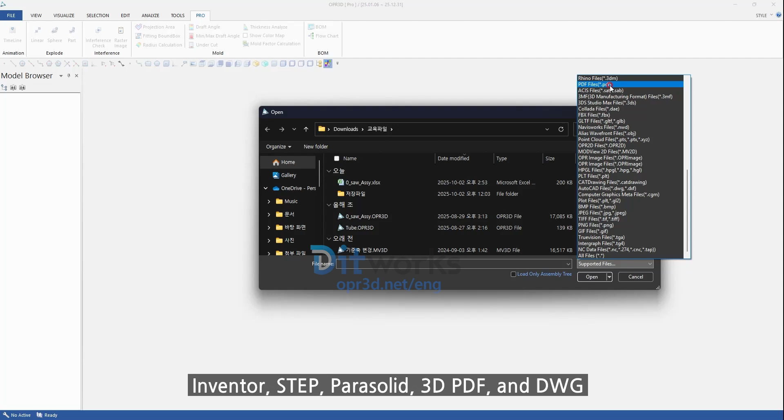Let's start by looking at the default screen of OPR3D. On the default screen, all functions are visible at a glance, making it very easy and convenient, even for beginners to use. OPR3D can read various 3D 2D CAD files, such as CATIA, UG NX, SolidWorks, Solid Edge, Inventor, STEP, Parasolid, 3D PDF, and DWG, without conversion, allowing direct use in work.

Next, let's look at file opening methods. You can easily open files by clicking the Open icon. Alternatively, you can drag files from the folder where they are saved, or select multiple files using the Control key.

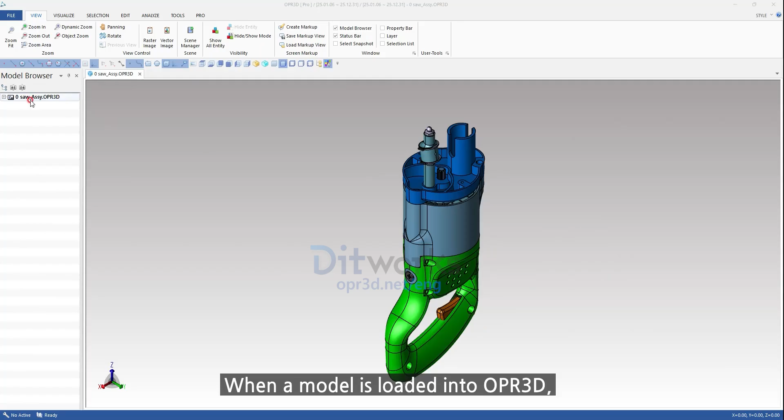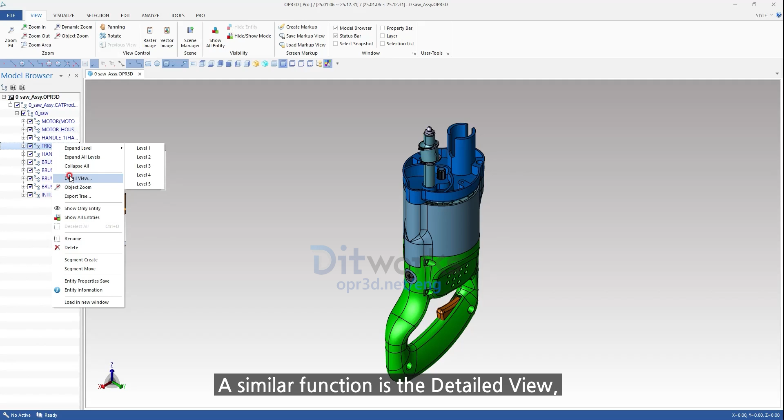When a model is loaded into OPR3D, the model browser properties on the left become active. Through the model browser properties, you can check sub-properties of the model, or turn the model on or off with check marks. Hovering the mouse over the model tree activates the preview function. A similar function is the detailed view, which allows you to check each model tree, or easily use the bound box and image capture functions.

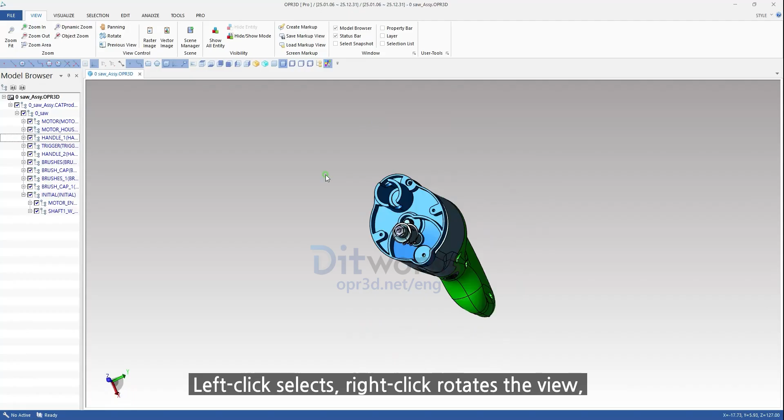Next, let's look at the mouse operations. Left-click selects, right-click rotates the view, and pressing the middle wheel button while moving allows free movement of the view. Scrolling the wheel up or down zooms in and out.

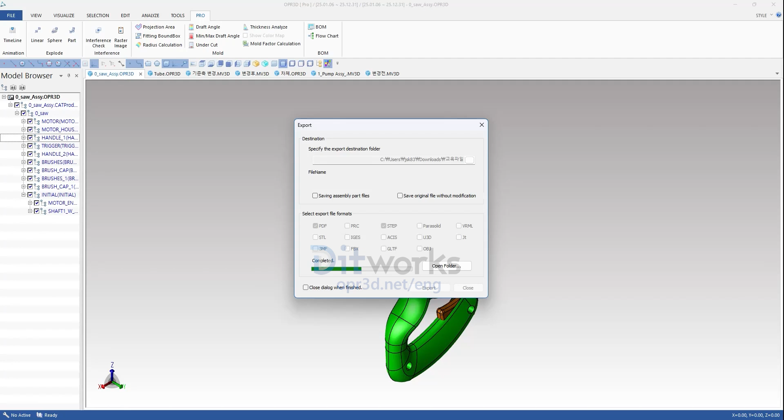Next, let's demonstrate the file conversion function. By selecting the export function in the file menu, you can convert to various files such as PDF, STEP, Parasolid, and IGES, or convert multiple files simultaneously by selecting multiple options. 3D PDFs can be read with only the free Adobe Reader, without any additional 3D software, allowing rotation and zooming of the model.

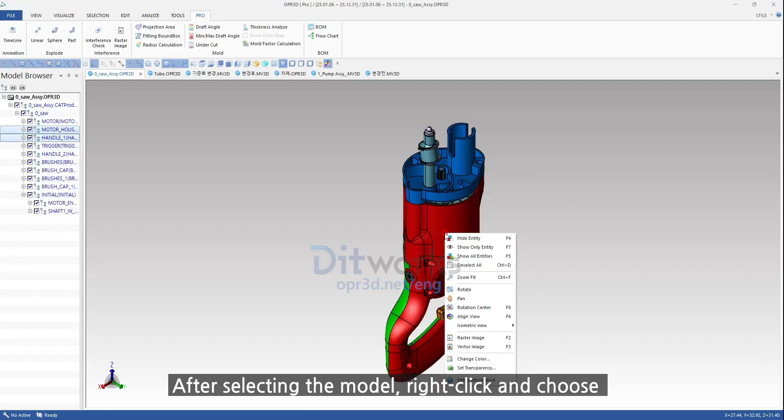Let's change the color and transparency of the model. After selecting the model, right-click and choose Change Color to modify the color. Similarly, right-click and select Transparency to view the internal components of an assembled product.

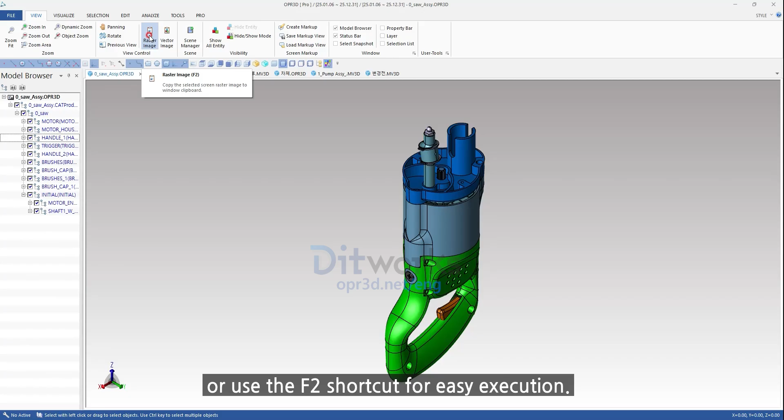Next is the screen capture function. You can select Raster Image in the view, or use the F2 shortcut for easy execution. Once activated, place the area to capture within the selection box, and paste it into a document to confirm the captured product. The background is automatically changed to white.

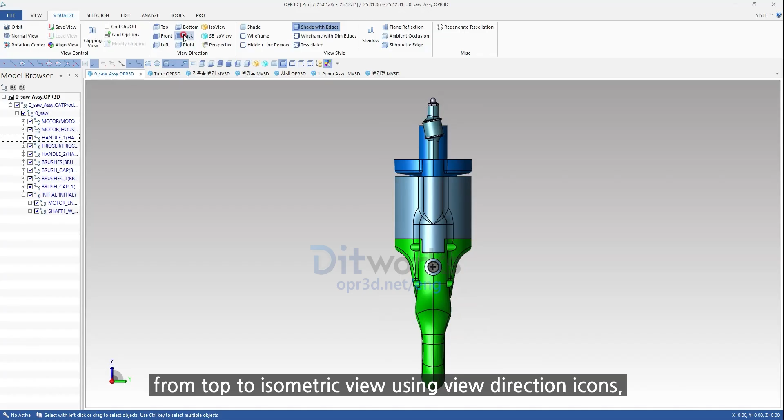Let's look at the visualization features that control the screen. Visualization allows checking the product from top to isometric view, using view direction icons. And view style lets you change the model shading, hidden line removal, edge display, etc.

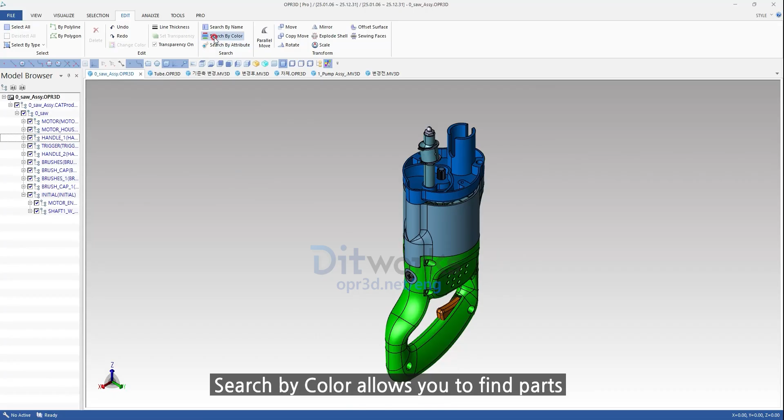Next are the editing functions. Let's look at search by name and search by color. Search by name allows you to find a part by searching for its name set in the model browser. Search by color allows you to find parts by selecting the color assigned to them.

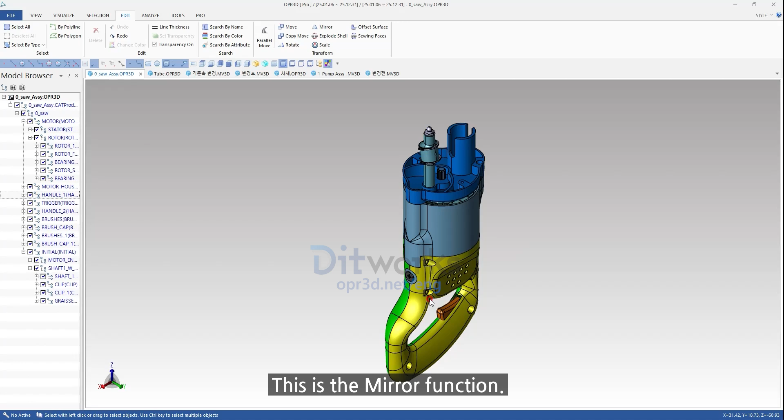Now let's look at simple editing functions for products. First is translation. Translation allows moving the product along X, Y, Z axes, and clicking the center ball while moving the mouse allows free movement. This is the mirror function. It allows you to create mirrored data based on a selected plane.

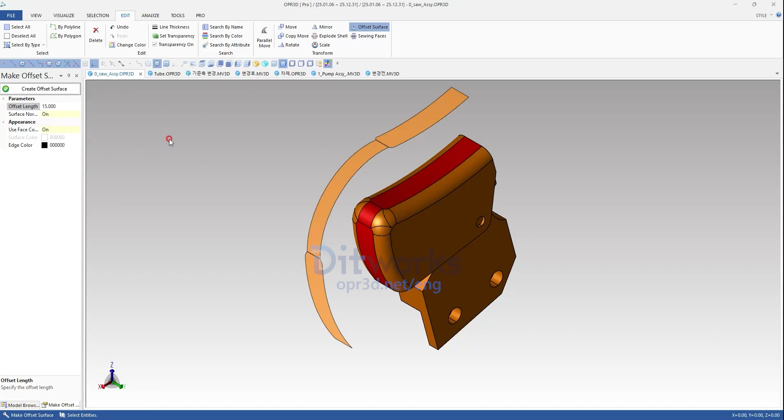The offset surface function lets you create a plane at a user-defined distance from a selected surface, and easily check coordinates and interference with the product. Other functions such as move, rotate, and scale are also available.

Next, let's look at the commonly used analysis functions. The bound box function measures the overall dimensions of a part at once. Select the shape to measure and click Compute to see the width, height, and depth, all at once.

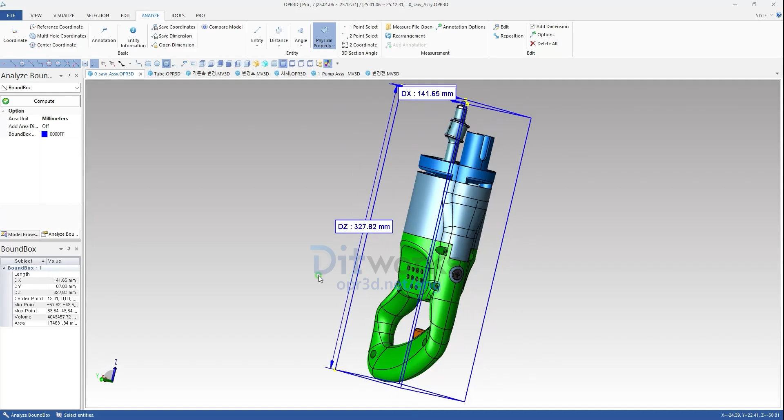Let's measure the product's volume and weight. In Physical Property Measurement, select the volume and weight icon. Choose the shape to measure, and click Compute on the left to complete the calculation. You can select specific points to measure both volume and weight. If the desired material is not available in Options, click Add Material to enter the material name and density, making it easy to add.

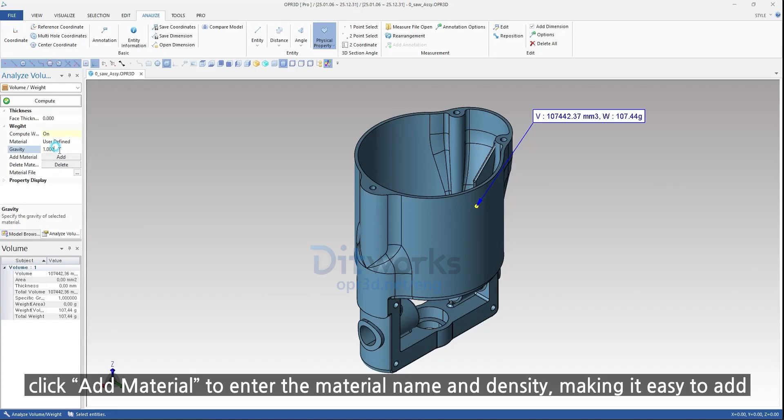Next, let's look at the dimension measurement feature of the analysis function. OPR3D automatically recognizes feature points of the shape, enabling accurate dimension measurement. First is the coordinate function. Selecting a feature point allows you to see XYZ values relative to the origin.

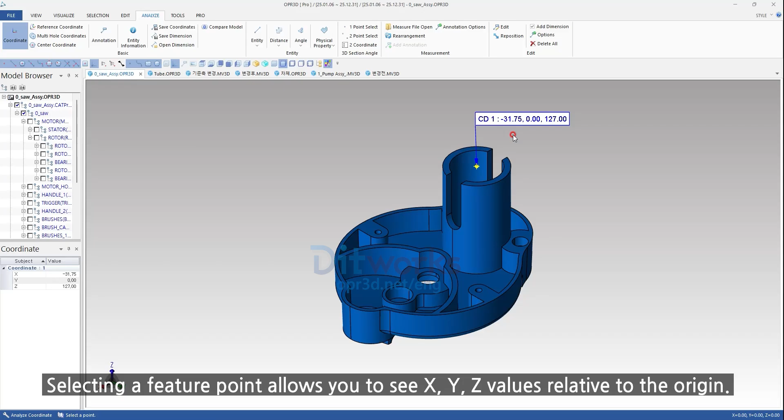For center coordinates, selecting the hole's outer edge gives XYZ coordinates and diameter at once. For multi-hole coordinates, enter maximum and minimum diameters in Options, select the plane to measure, and click Create to get hole center coordinates from the selected plane. Measured coordinates can be saved using the Save Coordinates function for later reference or use.

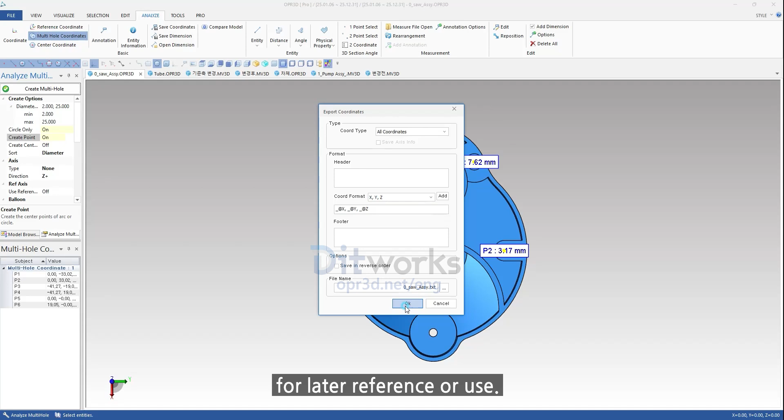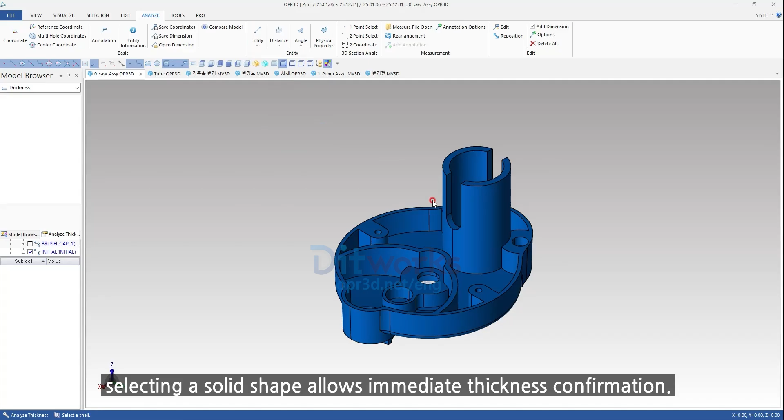Let's measure the radius and diameter of circles and arcs. In Object Measurement, use the Radius function and select the hole's outer edge to see the radius. For the diameter, similarly select the outer edge to get the value. For thickness measurement, selecting a solid shape allows immediate thickness confirmation.

Next is the hole depth function, which measures the depth of holes. Select the outer edge of the hole to get the depth, and holding Control during measurement allows checking stepped areas.

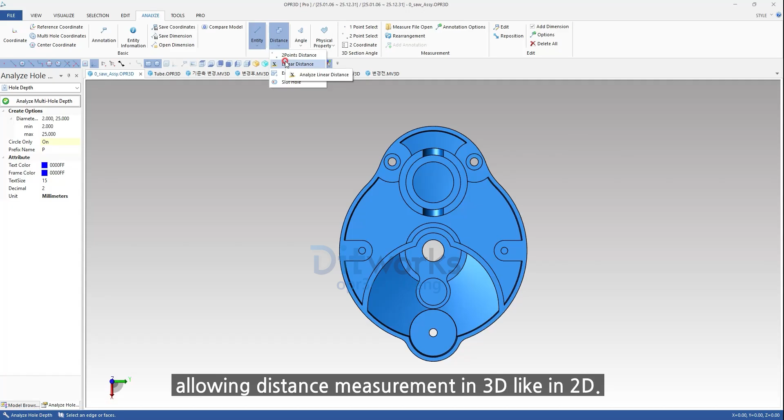This is the linear distance XYZ function, allowing distance measurement in 3D like in 2D. First, set and select the x-axis, then measure. Measured distance values appear aligned vertically and horizontally. Set the direction to Y to measure along the y-axis.

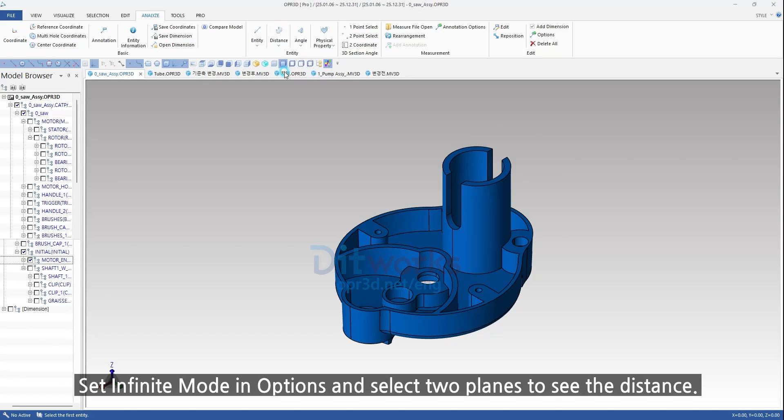Next, let's look at distance between objects, which shows the distance and shortest perpendicular distance between two selected planes. Set infinite mode in Options and select two planes to see the distance. For shortest perpendicular distance, select centers of two holes to confirm the value.

Let's measure angles. The line-to-line angle function allows angle measurement between two edge lines by simply selecting them. For plane-to-plane angle, select two planes to measure the angle.

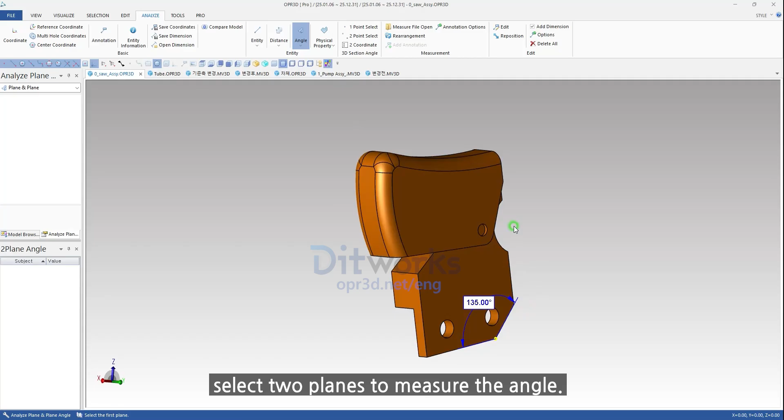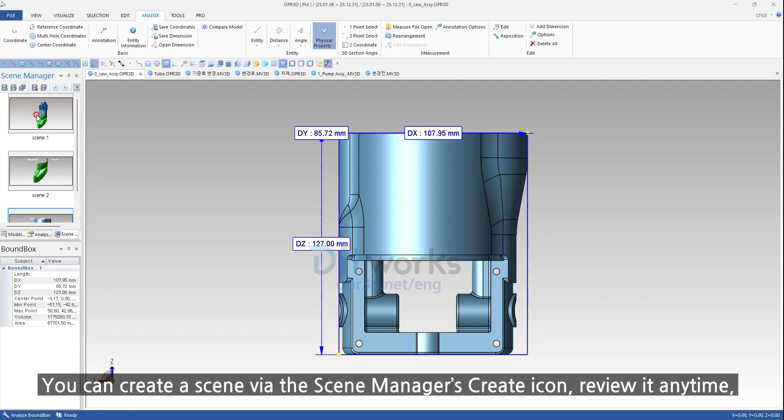Next is the Scene Manager function, which saves the current workspace for later review. You can create a scene via the Scene Manager's Create icon, review it anytime, and update the scene after additional modifications.

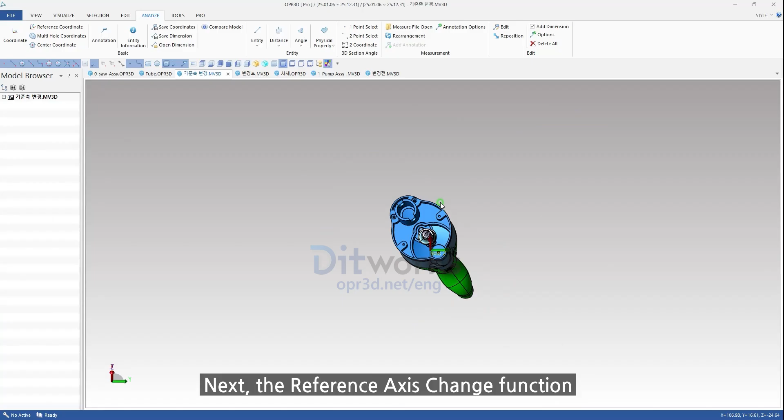Next, the Reference Axis Change function lets you set tilted products in a desired orientation. Create an axis at a desired point, select Change Reference Axis, and the reference axis will update. Changing the reference axis changes the product's origin, allowing rotation along the new axis to set the desired orientation.

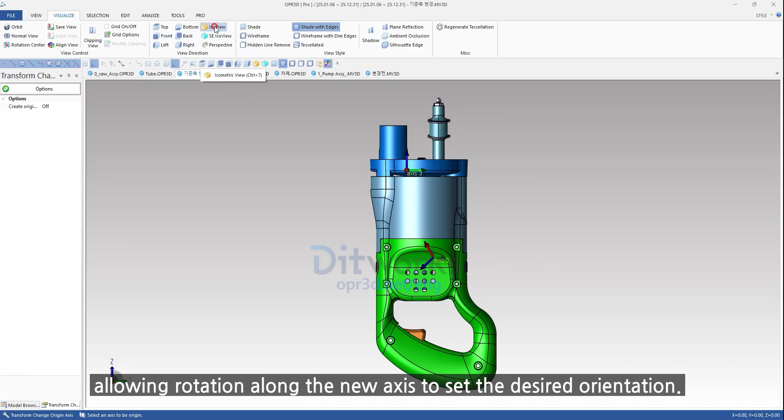Let's look at Clipping View and Planar Section functions for creating cross sections. Clipping View allows users to cut the model along a desired plane for inspection. Using the Change Origin option, clipping views can be generated at the desired location.

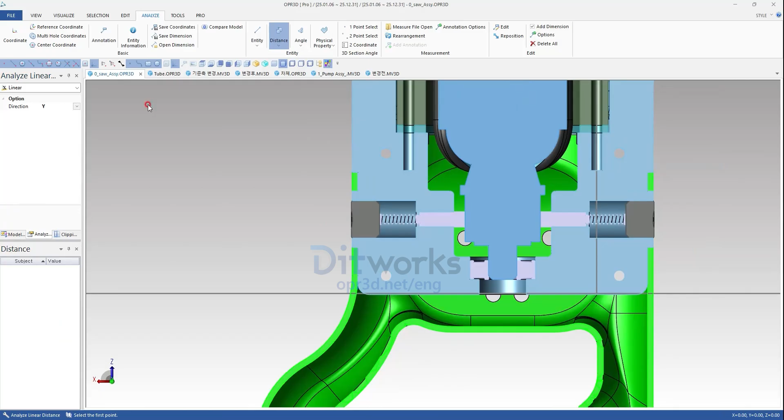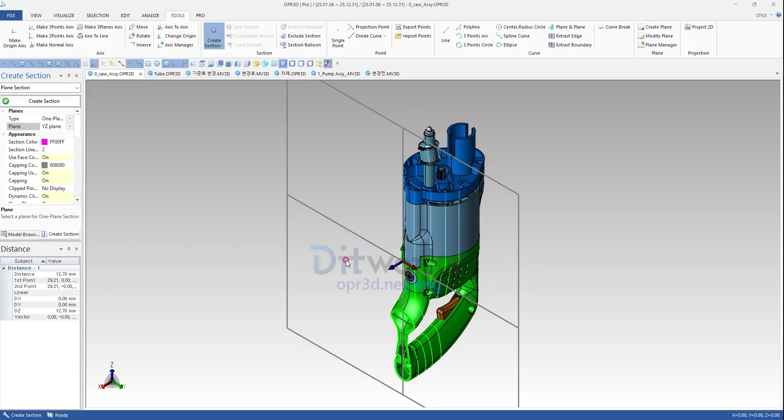Planar section function creates a section for 2D projection. Coordinate section allows creating multiple sections at specified intervals. Sections can be reviewed in Section Manager and exported as IGS, DXF, or DWG. The 2D view projection option allows projecting all sections into 2D at once.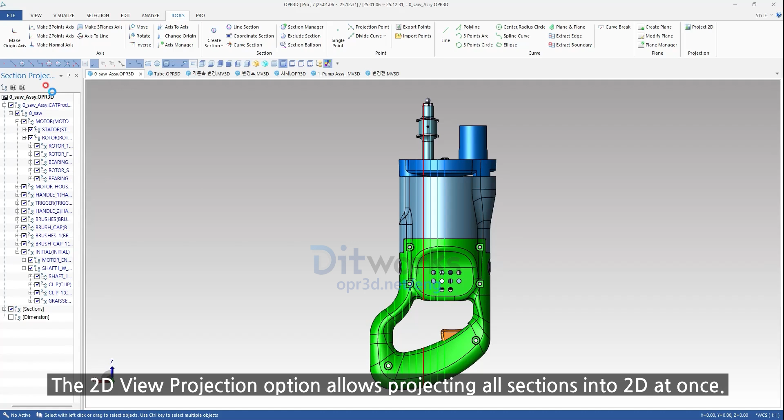Let me show you the Model Compare function, which allows you to compare models before and after data modifications to identify the changed areas. After loading both the before and after models, click the Model Compare icon in the Analysis menu to open the comparison options.

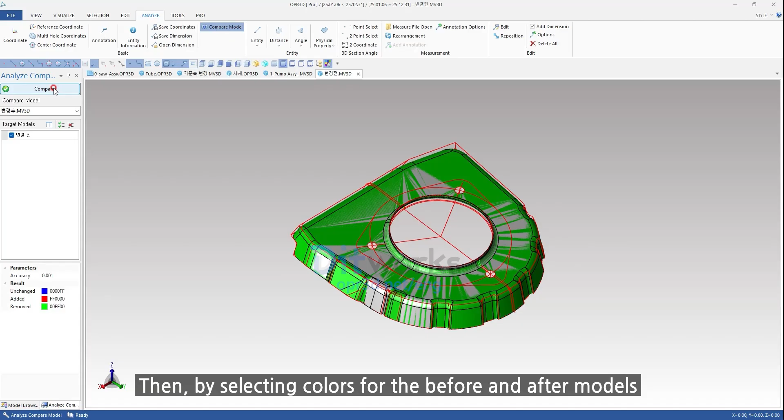Then, by selecting colors for the before and after models and clicking the Compare button, you can visually check the data using the chosen colors. You can also use this function to create cross-sections of the modified areas and measure the changed dimensions.

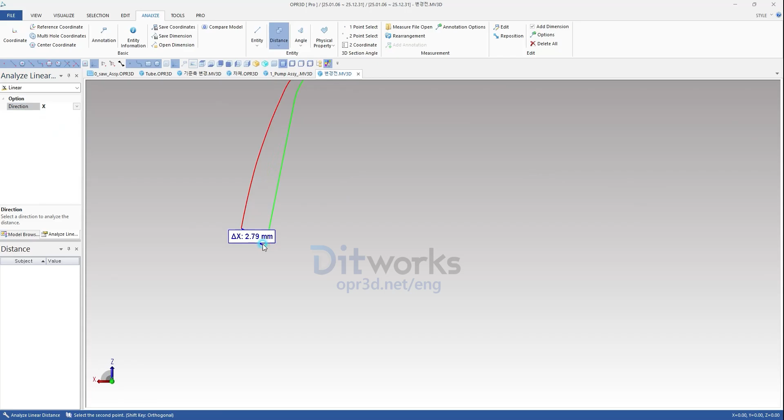Let me show you the 2D view projection feature. This function allows you to convert 3D models into 2D views. In the projection type options, you can choose between third angle projection or a custom option. If you select the custom option, you can manually choose the desired views to display.

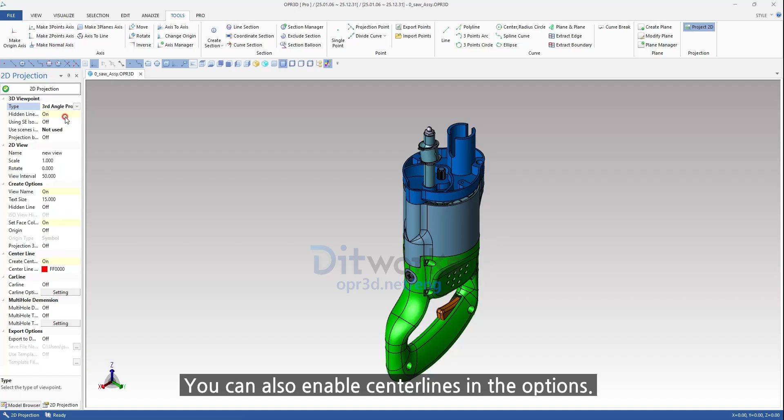You can also enable center lines in the options. After setting the options, clicking the 2D projection button will convert the 3D model into a 2D view. By selecting Export from the File menu, you can save the result into 2D-compatible formats such as DWG.

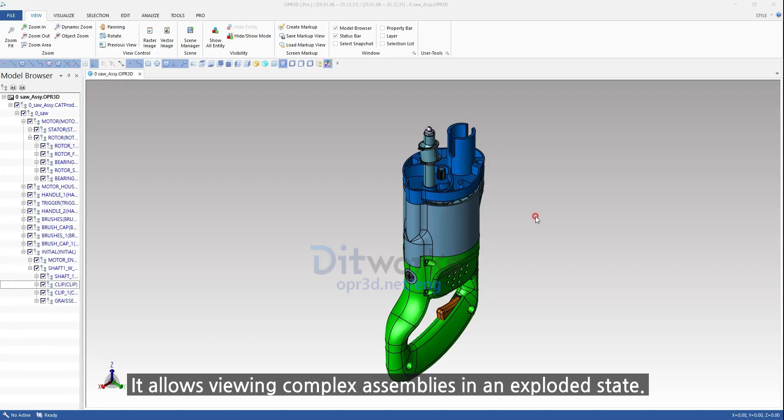Next, we show Pro functions, starting with the Explode function. It allows viewing complex assemblies in an exploded state. Linear or spherical explode lets you separate objects along an axis or sphere, automatically saving the exploded scene in Scene Manager.

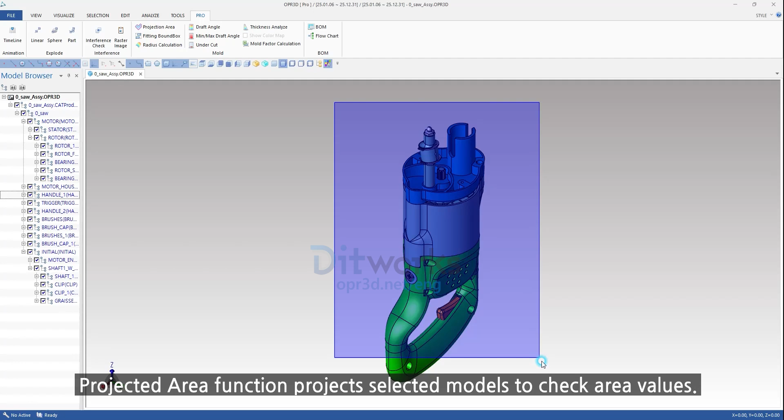Projected area function projects selected models to check area values.

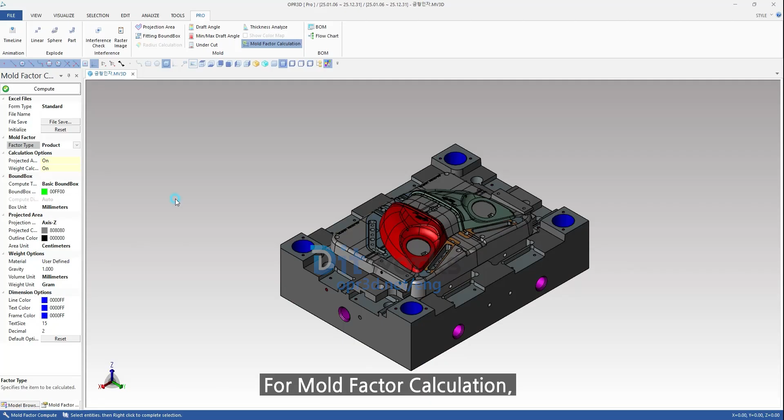Injection mold manufacturers commonly use mold factor calculation, which is also provided. For mold factor calculation, set axis direction, material, and units for bound box, projected area, and weight, then select the object and calculate. Calculated values can be saved as an Excel file.

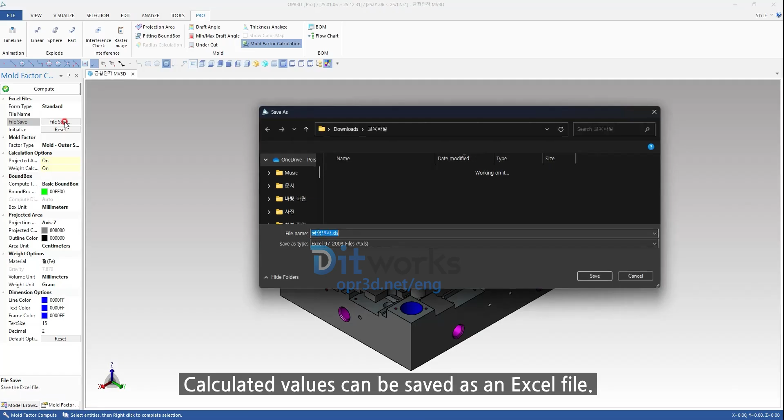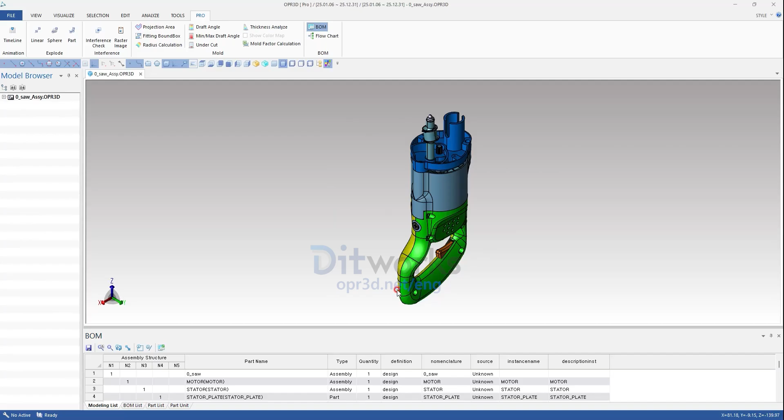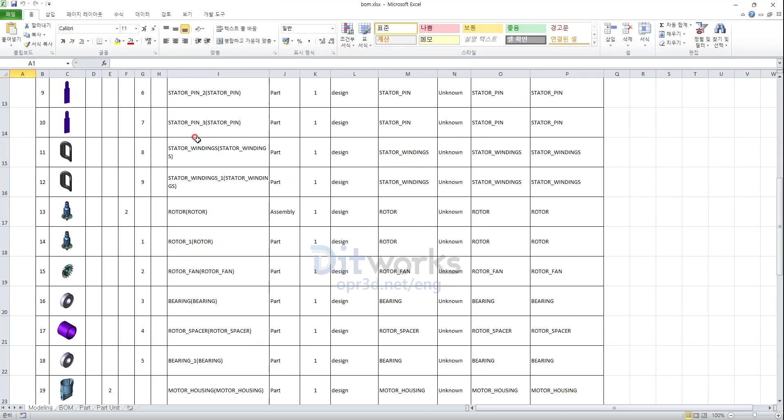BOM function allows immediate creation of a 3D assembly BOM. The flowchart function lets you check the assembly sequence and save as Excel.

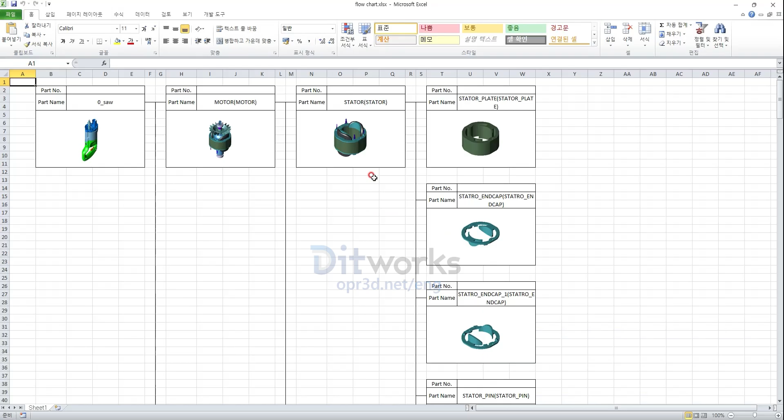The interference check function allows easy identification of interference in complex assemblies. Set interference type, gap, tolerance, and parts, then run to list interfering parts, and visualize them on screen.

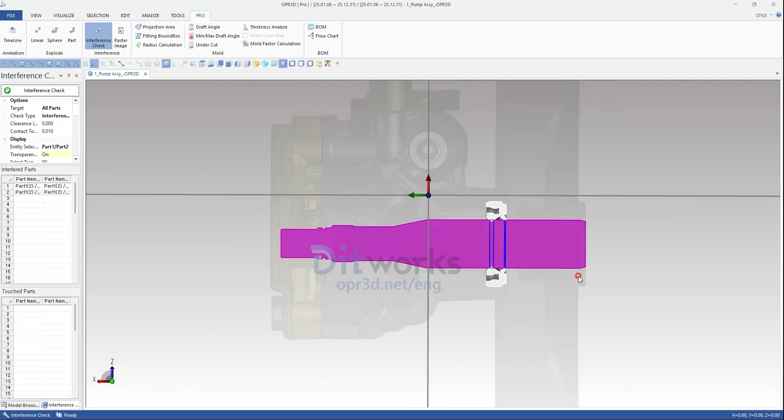Additionally, OPR3D provides various convenient functions tailored for domestic working environments. Its ease of use makes it an excellent product for departments such as development, quality, and cost, as well as sales, production, and field operations.

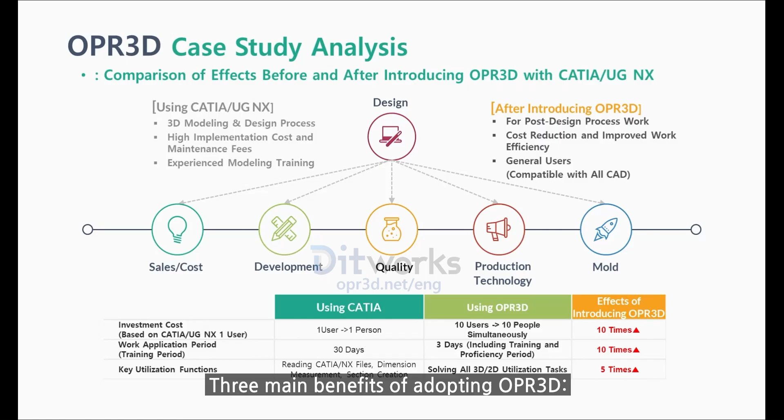Three main benefits of adopting OPR3D. Maximized ROI: OPR3D allows 10 users simultaneously, compared to single-user CATIA or UG NX, increasing efficiency over 10 times. Rapid implementation: only 3 hours of training for immediate use, unlike CATIA or UG NX requiring 30 hours.

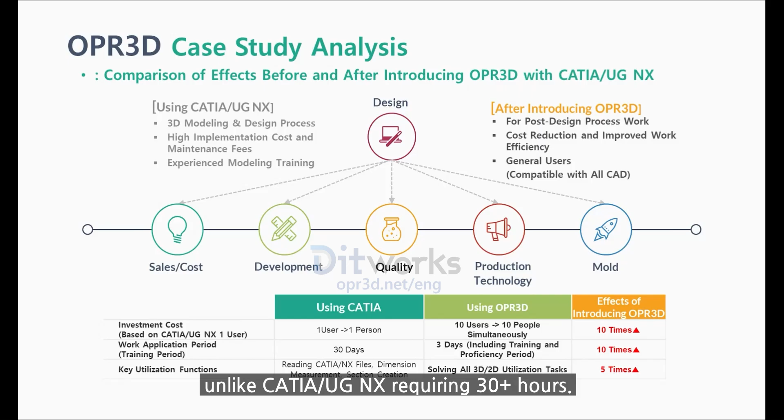Fast technical support: a product that has been under development and support for 25 years, providing essential features, performance improvements, and technical support quickly. Thank you for listening.